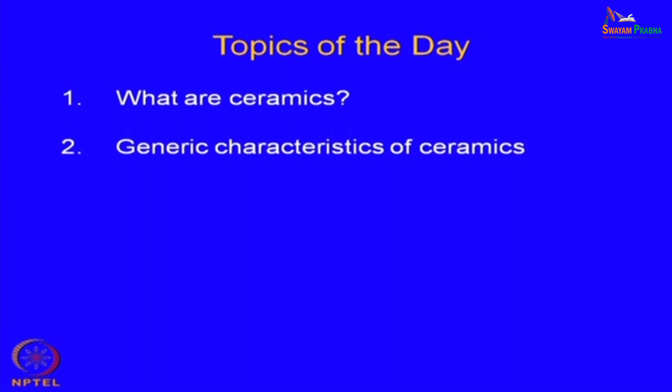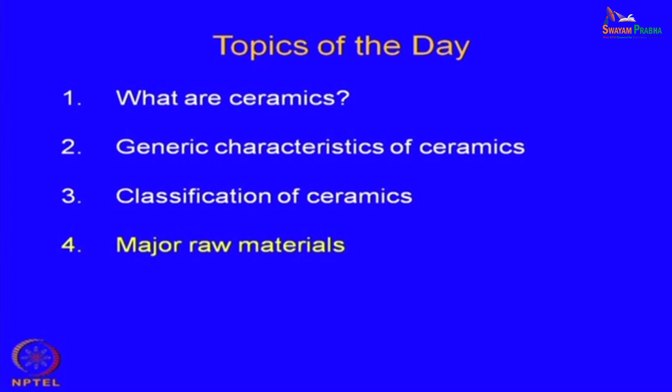This is the continuation of my earlier introductory lecture, where I tried to introduce the subject, its scope, the materials to be covered, and the distinction between traditional and advanced ceramics. I started with the definition of ceramics, the generic characteristics of ceramic materials, and classification of ceramics. That part is complete, but two more topics remain: the major raw materials, how we get raw materials for both traditional and advanced ceramics, and the basic principles of manufacturing techniques. We will discuss these in detail later as individual lectures, but for now, some introductory comments.

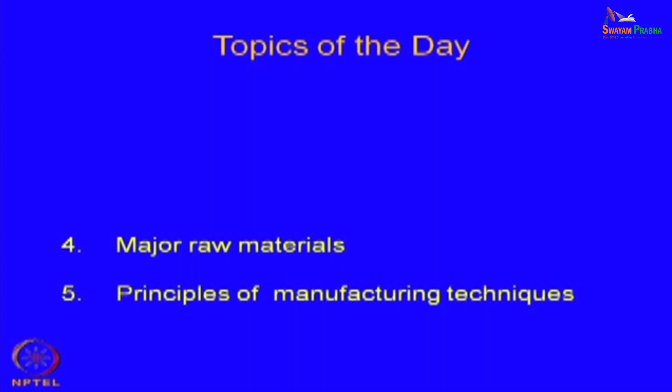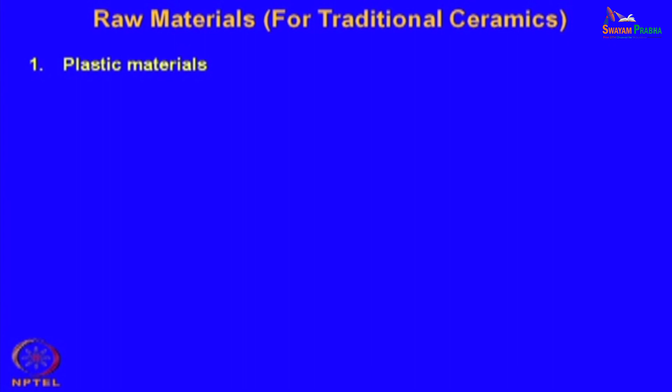Raw materials, particularly for traditional ceramics, are normally naturally occurring. They are available in nature in different forms of minerals. You purify them to some extent and directly use them for processing different products.

So what are these products? There are three components of traditional ceramics. One is called plastic materials. This property of deformation appears once you add water to these minerals, particularly clay minerals containing kaolin, talc, and so on. When mixed with water, it forms a plastic mass that can be deformed without much pressure, even with hand pressure, and it will not crack. So a material which is basically brittle, as we discussed, if made into a mixture of fine powders with water, forms a plastic mass and can be deformed quite easily.

However, only specific types of raw materials produce this plasticity, and they are called plastic raw materials. Not all ceramic materials give rise to this property. It is normally the clay minerals that give rise to it. They assist in the forming process, deform easily without rupture, and retain the imposed shape. Examples are clay, kaolinite, and talc. This is one of the major components of traditional ceramics.

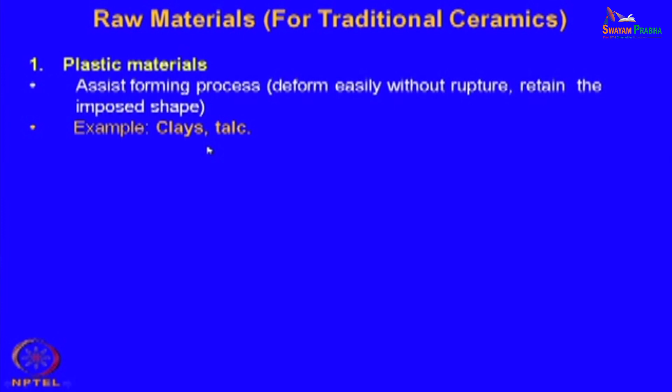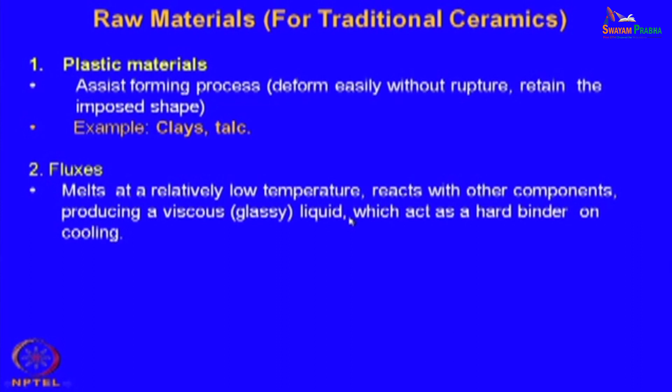The second component of traditional ceramics is called fluxes. These are also raw materials available from nature, some minerals, with a relatively low melting point. They react with other components of the mixture, for example the plastic clay, producing a viscous or glassy liquid. When fired or heated at high temperature, not everything melts; only the fluxes melt easily and form a glassy mass. This glass acts as a binder on cooling—the viscous liquid solidifies and binds the rest of the powders.

So flux is the second component of traditional ceramics raw materials, and an example is feldspar. We'll discuss its composition later, but this material basically contains alkali metals like sodium oxide or potassium oxide—hence names like potash feldspar or soda feldspar—and they act as a flux.

The third component is called fillers, which do not melt easily and do not produce a plastic mass when mixed with water. This is brittle but hard material, and it develops strength after firing or sintering. It provides the rigid component during forming and firing—forming being one step, and we will discuss the basic principles of fabrication shortly. This filler material confers important physical properties such as thermal expansion and strength.

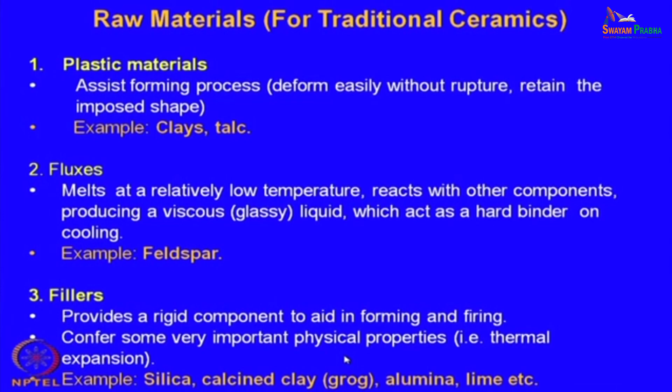Examples include sand, aluminum oxide, sometimes lime, or even a fired material of the plastic clay mass, called grog. These are brittle materials that do not have plasticity but provide strength to the body or product being made.

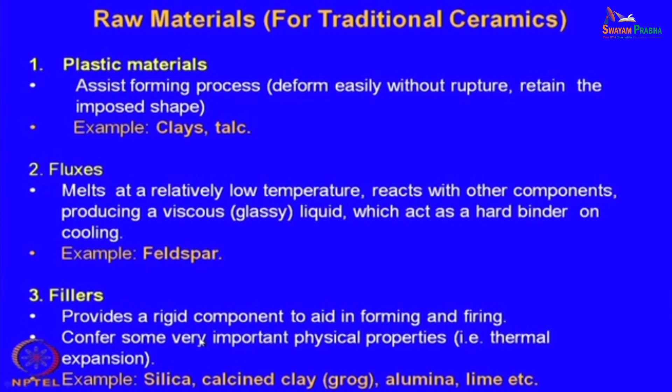So these are the three different raw materials primarily used for traditional ceramics. One important aspect to remember is that all these raw materials are available in nature—we do not have to synthesize or produce these compounds specifically. They can be collected from mines and purified to some extent; only a bit of beneficiation is needed to exclude unwanted components, so that a purer variety of the compound is used as raw material for traditional ceramics.

However, the situation is quite different when we are talking about advanced ceramics. The very basic characteristic of advanced ceramics, particularly the raw materials, is that they are very pure - pure oxides, pure compounds, pure carbides, pure nitrides, pure silicides, borides. So they are individual compounds, and many of them, except oxides, do not occur in nature.

Therefore, you need special preparation or synthesizing techniques to prepare these oxides, because unless you get these materials in pure form and in the desired or designed compositions, they do not produce the right kind of property you are looking for. Therefore, when talking about raw materials for the advanced ceramics group, most of them are synthesized. You need different techniques to prepare them.

Now, examples of the compounds, particularly oxides, when talking about the electroceramics group - one subgroup of advanced ceramics - here is a list of compounds which are useful, and we exploit different properties to make different devices.

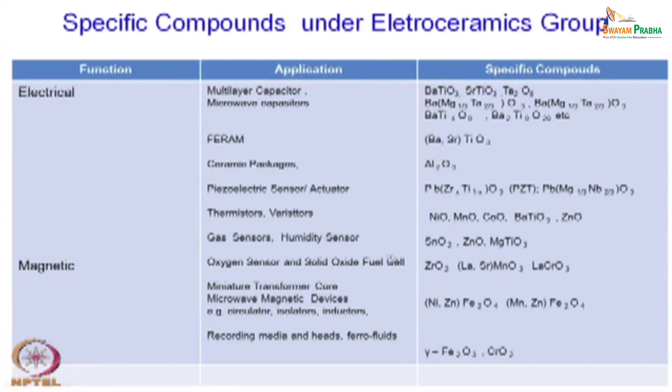There are oxides, no doubt, pure oxides: aluminum oxide, magnesium oxide, zirconium oxide, I have just mentioned because of their toughness. These are insulating materials, fairly strong and cheaper, and mostly available from nature. Aluminum oxide, magnesium oxide, zirconium dioxide are all minerals which can be obtained from natural resources, but they need some purification, some beneficiation, because the impurity content affects the properties quite significantly.

So the impurities must be removed. Once you get the material from natural resources, it needs different kinds of purification techniques, mostly chemical purification and mineral dressing. So mineral dressing followed by chemical purification is the normal technique by which you can get these raw materials from nature. However, there are a host of other structural ceramic compounds used in structural ceramics.

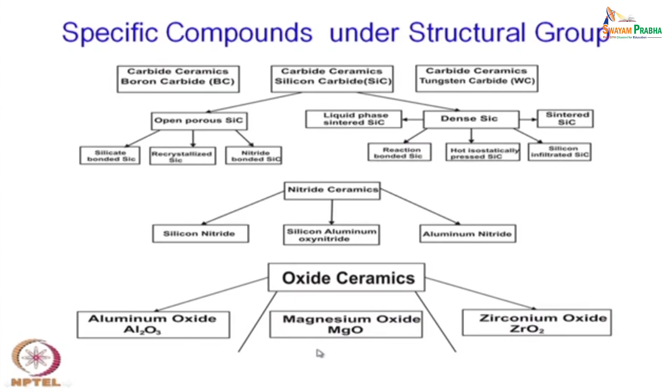Now we come to the preparation technique. What is the basic preparation technique used for both traditional as well as advanced ceramics?

Well, if you are talking about pure oxides, primarily for the advanced ceramics group which I have just discussed, there are different techniques by which one can make high purity oxides. Chemical purification is one route. For example, if you are talking about aluminum oxide, you can just take the bauxite, then remove iron oxide and purify it properly, so that a pure form of aluminum oxide can be available to you for even advanced ceramic materials, advanced ceramic products.

There is a technique, we will discuss these things later, what are the different considerations, what are the basic synthesis techniques, but there is a technique called sol-gel synthesis: solution followed by gelation. It is a solution chemistry route. You take the elements in the solution form, and it may be an aqueous solution, but many times, most of the time, it is a non-aqueous solution in an alcoholic medium.

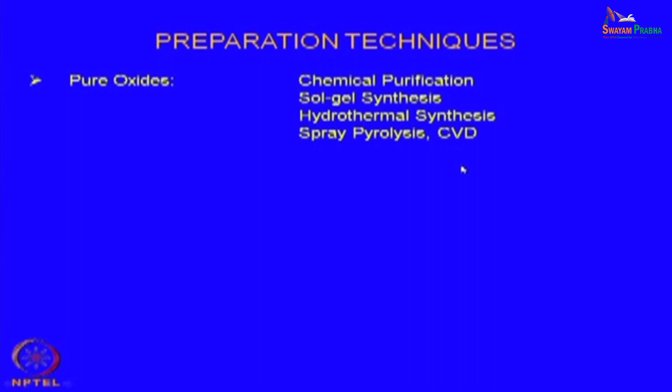You have a number of mixed oxides, as I mentioned. We need different kinds of mixed oxides like barium titanate, spinels or ferrites, nickel oxide, iron oxide, barium oxide, titanium oxide, strontium oxide, and so on. These also have to be synthesized following special techniques. One very simple technique is what we call solid state sintering or solid state synthesis.

If you want to make, for example, barium titanate, you just take barium oxide in the form of carbonate, barium carbonate, and mix it with titanium dioxide and heat it to high temperature. At high temperature there is a chemical reaction between barium oxide and titanium dioxide, and you get a second compound in the form of a mixed oxide called barium titanate.

Similarly, if you want to make a ferrite, a magnetic ceramic material, you take pure Fe2O3, and other oxides like zinc oxide, manganese oxide, nickel oxide and so on, and heat it to an appropriate temperature, normally above 1000 degrees centigrade, maybe in a controlled atmosphere, so that the stoichiometry can be maintained properly, and at the end of the firing you get a mixed oxide compound.

So this is one of the simplest ways to make mixed oxide, and a large number of ceramic oxides have been prepared by this technique.

However, one of the difficulties is that you may start with very fine powders, but after the synthesis, after the sintering or high temperature reaction, these powders will grow and you end up with relatively large size particles. So you may not be able to use it properly for fabrication, and therefore solid state sintering techniques are not normally preferred these days.

Hydrothermal as well as CVD can also be used for this technique, except that instead of pure oxide you make mixed oxides.

However, non-oxide compounds like carbides, nitrides, oxynitrides and so on are a little difficult to prepare. It is not so easy to prepare them under normal conditions.

So sol gel and co-precipitation techniques are not normally used for non-oxide compounds. Instead, we go for carbothermal reaction. Basically, carbothermal reaction is an oxide mixed with carbon and heated to high temperature. It is normally an endothermic reaction, and by that process metal carbides can be formed. This is a very common technique for making carbides, whether it is silicon carbide, tungsten carbide and so on.

They are mostly made by the so-called carbothermal process, which is nothing but mixing with carbon and then heating it in an inert atmosphere, so that the carbon does not get oxidized in presence of oxygen. So oxygen should not be allowed when the reaction is going on.

Once again, in all these things, because these are non-oxides, oxygen has to be excluded. The presence of oxygen should not be there, and that is an important criteria for whatever you do here, whether it is solid state reaction, solid gas reaction, carbothermal reaction, or decomposition of organometallic compounds. So whatever you do, you have to exclude oxygen. The presence of oxygen must be avoided to make non-oxide compounds, which is quite obvious.

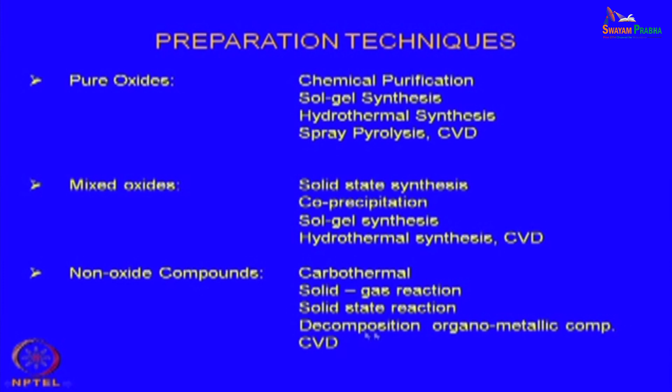So there are many organometallic compounds which can be directly decomposed or pyrolyzed to form some of these non-oxide materials, either carbides, nitrides, or silicides, borides and so on. CVD once again can be used for this purpose.

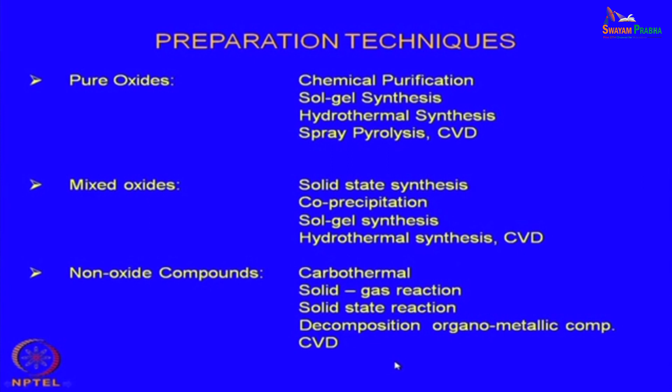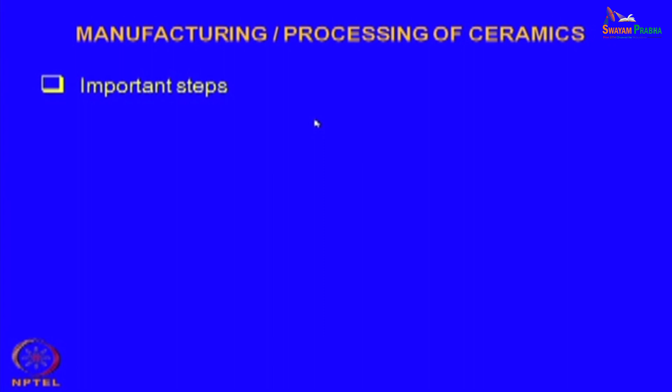So, having discussed the various types of raw materials, basically the different compounds required for the preparation of both traditional ceramics and advanced ceramics, let us try to see the basic steps necessary for the manufacturing or processing of ceramic products, or how exactly some products can be made. The important steps are like this.

As I mentioned earlier, our starting material is always powders. It is not lumps; even if lumps are available, they have to be ground to a very fine powder. Since most ceramics or ceramic materials have a high melting point, melting is always avoided, because it is a very high temperature process and not so economic. So melting is always avoided, but we start with powders.

Now, at the same time, these powders must be consolidated enough, so that at the end of the fabrication process you do get a geometrically sound material or mechanically sound material. So this is your first step, the batch.

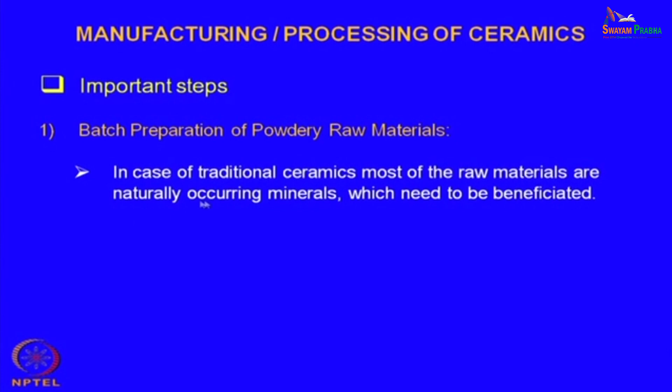So you have to prepare some batch, that is, you mix different raw materials. If you want to take mixed oxide, for example, they must be mixed together in appropriate proportions. So you form a batch preparation for the powdery raw material. In the case of traditional ceramics, most of the raw materials, as mentioned already, are naturally occurring minerals which need to be beneficiated. For advanced ceramics, normally synthetic raw materials or specially prepared powders of different compositions are used as the raw material. So these are the raw materials and the basic difference between traditional and advanced ceramics.

Control of both composition and particle size, and sometimes particle shape, are of tremendous importance. As I mentioned, chemical composition is important, particle size is important, so that you have finer particles, and your starting material has less pores or open spaces between the particles, so that consolidation and mechanical strength development becomes easier at a later stage.

Then you have different shapes of the particle, sometimes spherical, sometimes more angular, sometimes cuboid kind of shapes. Many times, depending on the crystal structure, you can get hexagonal crystals. So shapes are also important depending on the particular nature of the raw material and the product you want to make.

Once you have the powder composition, you have to consolidate it, meaning you have to give it a shape. The shape is done through consolidation, and the powders are normally mixed with some organic binders.

In ceramic terminology, green means without fire, not having been heated. Whatever you do at room temperature is actually green processing, and the shapes you get at room temperature are called green ceramics.

In green ceramics, the powder cannot be loose; the particles have to adhere to each other, and therefore, to facilitate that, you add some organic binders.

These are mixed, followed by application of high pressure using a steel die and punch. Depending on the shape and size you need, you have a steel die and punch or a mold in which these powders are compressed under high pressure.

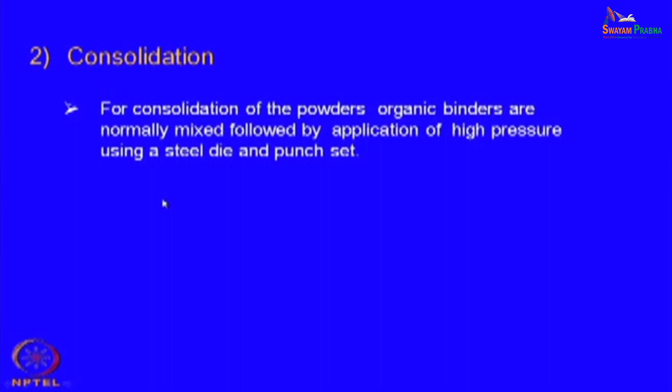The pressure depends on the size, shape, and quality of the product you make. At times you have to apply thousands of tons of pressure or load to consolidate them. This is one of the simplest ways to consolidate powders or give them a shape.

Alternately, powders are suspended in an aqueous or non-aqueous media to prepare a viscous slip. These fine powders are suspended in a liquid medium, normally a kind of electrolyte; water is a good electrolyte for some materials.

This slip, a thick suspension, is poured inside a porous mold. Normally in traditional ceramics, the porous mold is made of plaster of Paris.

So you control the porosity, and because of the capillary action, the water in which the material is suspended will preferentially be absorbed or soaked inside the pores, and the powders will form a skin on the surface of the mold.

This is particularly useful to prepare hollowware, like a cup or a vase, or even sanitary ware, which can be made by slip casting using a porous mold.

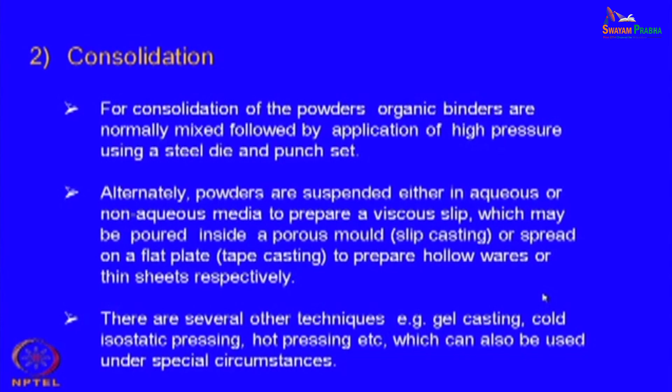Cold isostatic pressing, unlike uniaxial pressing which we discussed earlier involving high pressure from one direction, applies pressure from all sides, available through the use of a liquid, usually a high pressure oil.

You use an oil, and inside that you have the powder in the form of, inside a bag, a flexible bag. You put it there and then pressurize the liquid, so that a uniform pressure is applied from all sides.

That has its own advantage, because if the pressure distribution is not uniform and you have an inhomogeneous pore size to start with, at the sintering or firing stage there will be non-uniform porosity, and that will be a source of weakness so far as strength is concerned. That is the reason one uses isostatic pressing.

Even this is called cold isostatic pressing; one can also use hot isostatic pressing. You apply isostatic pressure and simultaneously heat the material to a high temperature. In this case, one cannot use a liquid because it involves high temperature, and therefore one has to use a hot gas environment.

Hot isostatic pressing is one of the latest techniques, and most high performance ceramics are made by this hot isostatic pressing. It is quite expensive, but it has its own advantages.

Finally, the third stage is basically firing or sintering, which is the final or pre-final stage you can say. As the melting point of ceramic materials is relatively high, they are normally not melted and cast to generate a shape.

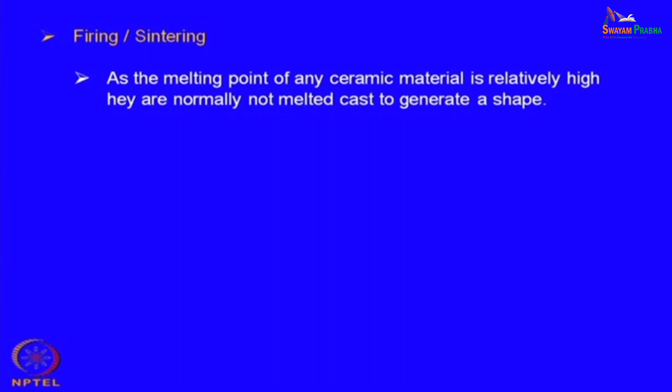In metals, melting and casting is a very common technique for making shapes, but ceramics, being high temperature materials, are normally not melted and given shape or cast in a mold. Of course, in some cases we do that, certainly for special purposes like refractories, or glass, but we are not discussing glass here, we are basically discussing ceramic products.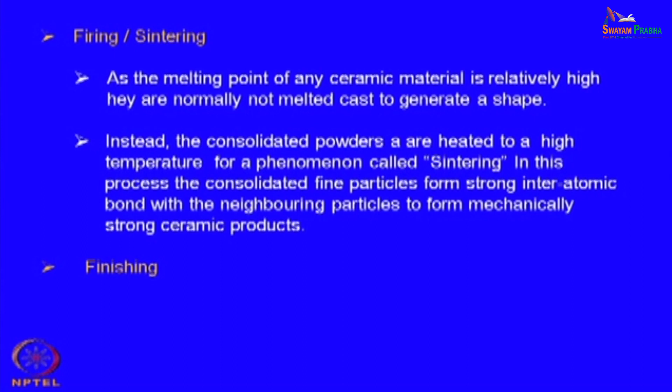Finishing of the dimensions primarily to match the requirement of dimensionality. Under certain circumstances, sintered ceramic articles require a post-sintering finishing operation, primarily to adhere to dimensional accuracy and surface finish.

So these are the two things very important for structural ceramic materials, because most of these are engineering components, either large or fine, and they need to conform to dimensional tolerance, sometimes very critical dimensional tolerance is necessary, and therefore we need finishing operation as well after sintering.

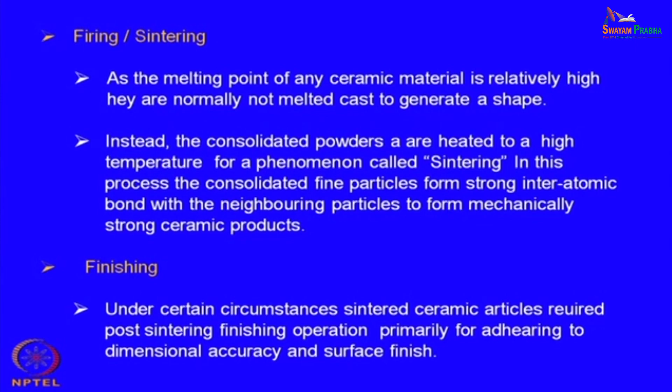So these are the four different steps by which powders, prepared by some special techniques as mentioned earlier, can be converted into a product which has the necessary mechanical strength, surface finish, dimensional tolerance, and different kinds of designs and configurations.

I think that completes my discussion on the introductory part of this course, which gives you an overall background of what we are going to discuss in much more detail at a later stage.

In the next class, we will be discussing the structures. We have discussed some of the compositions of different materials for different purposes, some of the properties, and so on.

Now we have to understand how these properties get developed, why these properties are there, why some ceramics are insulating, others are conducting, others are superconductors. Some have magnetic property and others do not have that kind of property. Some are very strong, but others are not so strong.

So we need to understand the structure-property relationship, and therefore we start with structure, the basic structure of some of these compounds, and slowly develop into how these structures provide the properties, or explain some of the properties we look for. Thank you.